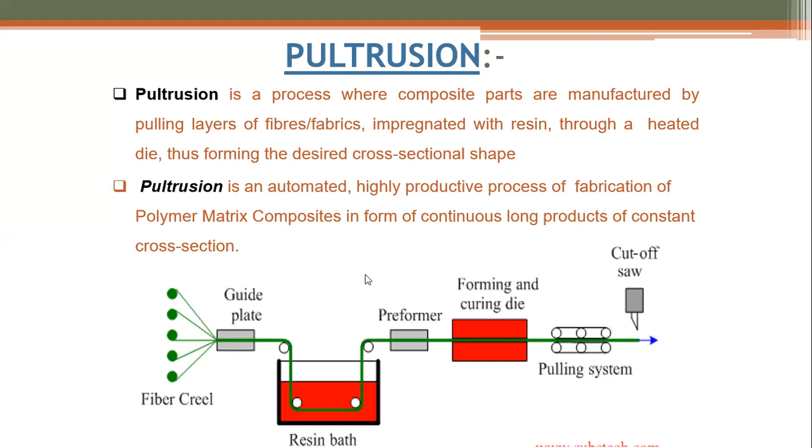Pultrusion means pulling. You can see in the picture these fiber creels being pulled along by the pulling system. You can see the fiber creels there. In the process, the reinforcing fibers are pulled from the fiber creels, which may be followed by rolled mat or fabric creels, and the pulling action is controlled by the pulling system. You can see the rollers.

Then guide plates collect the fibers into a bundle and direct it to the resin bath. Next, fibers enter the resin bath, where they are wetted and impregnated with the liquid resin. So fibers enter the resin bath, and they are dipped there.

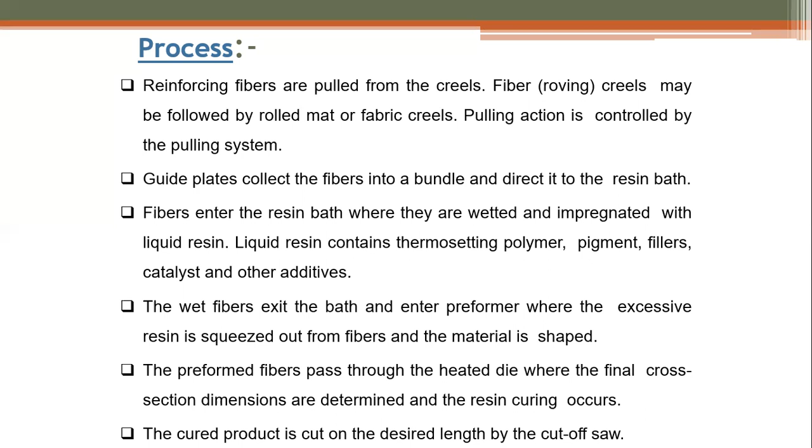Next one is the characteristics of pultrusion. Depending upon the continuous process and the continuous alignment of fibers, it has high productivity. You already know this is a continuous process, so we get high productivity. Second, the process parameters are easily controllable, because there is a division between each and every section of the process.

Next, low manual labor component: because it is an automated process, you do not need much manual labor. Fourth, precise cross section dimensions of the products, because the cutoff saw cuts the product within a time limit, 1 second, 2 seconds, 3 seconds or 4 seconds. That time limit given to the cutoff saw gives very good dimensions of the products.

Next, good surface quality of the products. Generally after curing it gets very good surface quality. Next, homogeneous distribution and high concentration of the reinforcing fibers in the material is achieved, up to 80% for roving reinforcement and 50% for mixed mat plus roving reinforcement.

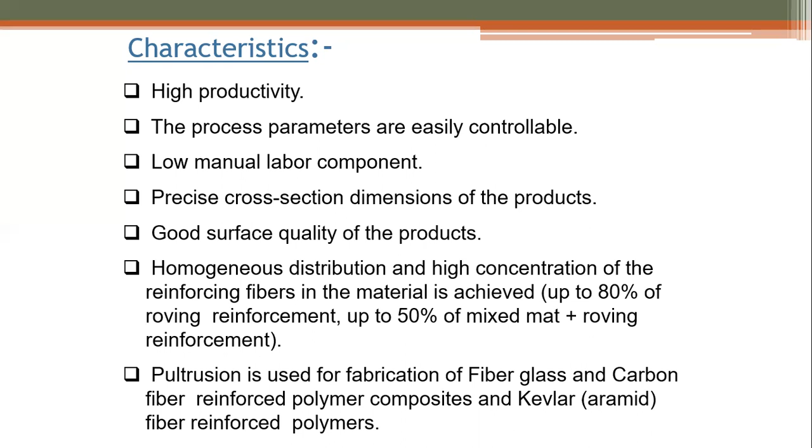Next we are going to the manufacturing process of pultrusion. First of all, fibers are brought together over rollers into a single unit, dipped in the resin and drawn through a heated die, and a continuous cross section composite part emerges on the other side. You can see the same process explained in this picture.

The coated fibers are laid into a single unit, then dipped into the resin, then sent to the preformer and the heated die. Then it is cured, pulled off by the pulling system, and cut off by the cutoff saw. So this is the general process.

You can see the die on the upper part of this slide. This is the heated die, and this is the cross sectional view of the die. By pulling the fibers through this die, the shape of the die is imparted to the fibers, and it is sent to the composite section. Look at the picture for a while.

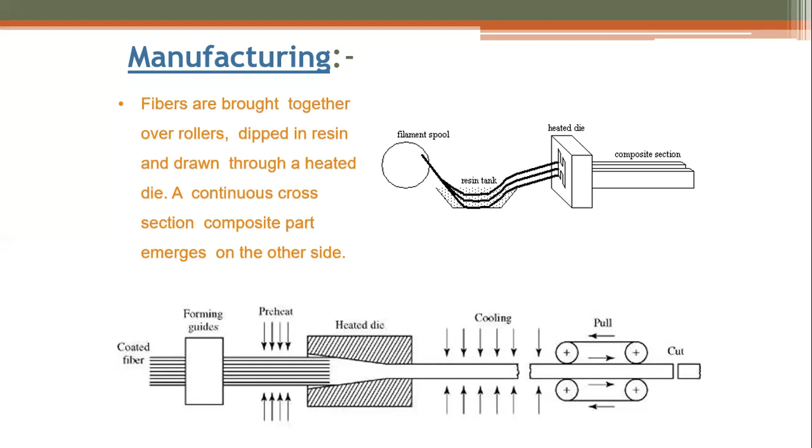So this is the manufacturing process of pultrusion. You can see in the picture the different stages. First the fibers are combined into a single roving from the different fibers. Then they are sent to the forming guides and to the heated die, and then cooled, pulled out by the pulling system and cut to the desired lengths by the cutoff saw.

This is the production view of the pultrusion process. This is the 3D view.

So different types of rovings have been seen here. You can see the starting of the process from the left side. So these are all the different rovings.

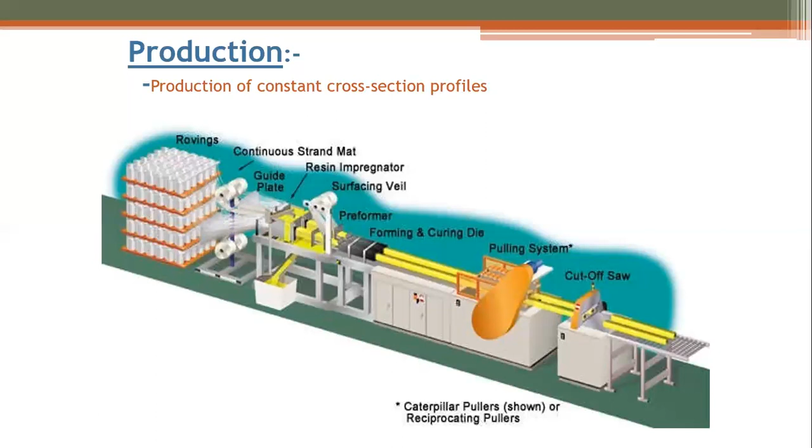Next one is the design. So first of all, hollow parts can be made using a mandrel that extends out the exit side of the die. So they are using the mandrels there which extend the exit side of the die. Then variable cross section parts are possible using dies with sliding parts only. So the continuous formation of these rovings has been used with the sliding parts only.

Two main types of these dies are, first one is the fixed die and second one is the floating die. So in these dies, the fixed dies can generate large forces to the wet fiber, but floating dies require an external power source to create the hydraulic forces in the resin. And multiple dies are used when curing is to be done by the heated dies. So a number of dies are used when curing is to be done by the heated dies only.

So this is for the design part which is to be selected for the different types of dies. So two main types of dies have been used. First one is the fixed die. Second one is the floating die. So the floating die is not used with any support. These fixed dies can generate large forces to the wet fiber, but the floating die requires an external power source. So that is the main difference.

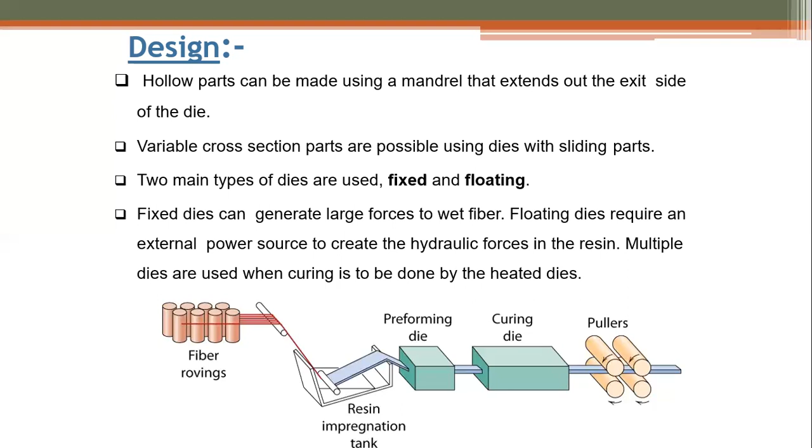And it has a very low scrap rate, that is up to 95% of the materials are utilized, which is very high compared to the layup methods, that is hand layup and spray layup methods. In those methods 75% of the materials are used, but compared to those methods, this pultrusion method utilizes 95% of the materials. So that is a very high rate. That is why we are getting a very low scrap rate there.

Rollers are used to ensure proper resin impregnation of the fibers also. Then material forms can also be used at the inlet to the die when materials such as mats, weaves or stitched material are used. So these material forms can also be used at the die, in different forms, that is the mats, weaves or stitched material.

Next, for curing, tunnel ovens can be used. Tunnel ovens means the two ends of the oven are open. General types of ovens are opened at only one end, but the specialty of tunnel ovens is opening in two ways. That is highly used in the heat treatment process, but here we are using the tunnel ovens for curing.

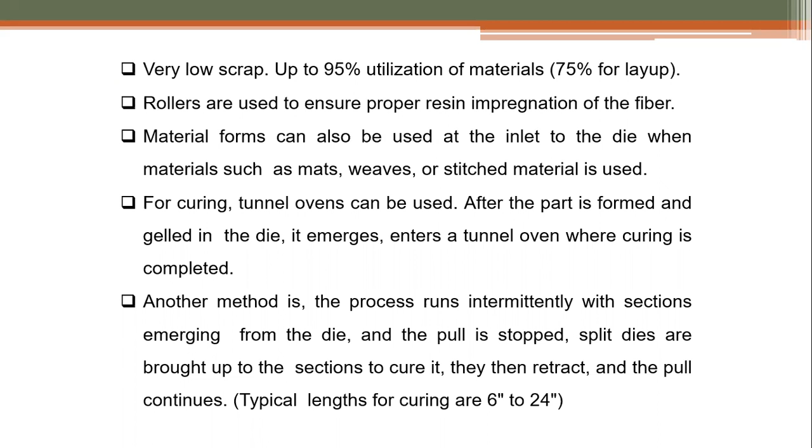Next one is the materials used for the pultrusion process. We have two types of materials here. First one is the fibers and second one is the resins. The most used fibers are carbon, glass and aramids. These are the three different types of fibers, and highly used resins are polyester and epoxy.

So the next processing method is speeds. The basic speed of the pultrusion process is 0.6 to 1 meter per minute. Mostly fibers used are carbon and glass. The thickness is 1 to 76 mm, and the diameters are 3 mm to 150 mm.

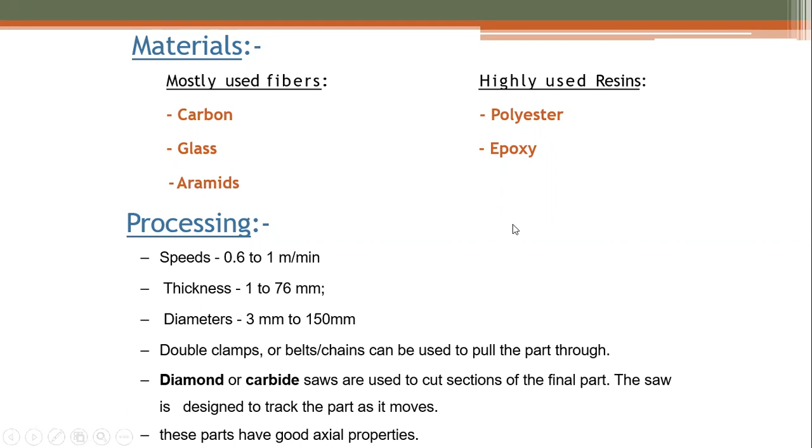Next one is the advantages and disadvantages. Coming to the advantages, it has good material usage compared to the layups. Layups means spray layup and hand layup method. Next, higher throughput and higher resin contents are possible.

And the disadvantages are part cross section should be uniform. Fiber and resin might accumulate at the die opening, leading to increased friction, causing jamming and breakage. Next, when excess resin is used, part strength will also be decreased.

Next, voids can result if the die does not conform well to the fibers being pulled. Voids means small particles formed in the liquid resin, and the interior structure of the voids is hollow. Next, quick curing systems decrease the strength of the pultrusion method.

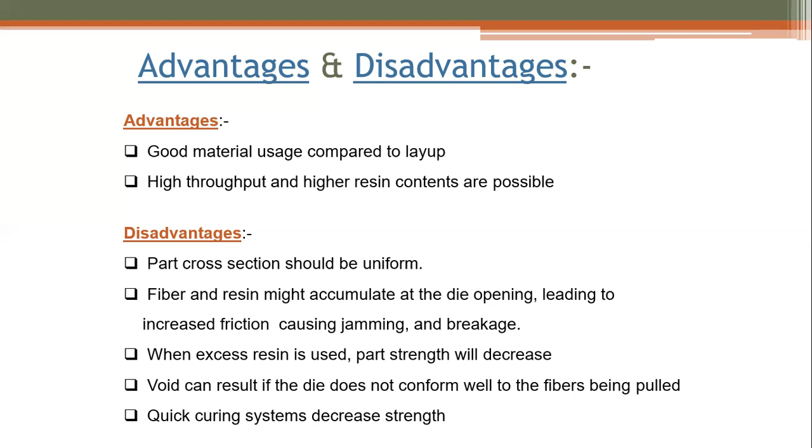Low material scrap rate. So a very low material scrap rate is obtained in this process. And last one is the good quality control of sections. This is the advantage. Next is the potential problems of the pultrusion process.

The potential problems means the disadvantages. First one is improper fiber wet out. When dipping in the resin and then curing, sometimes there is improper fiber wet out, so it is not cured fast due to the rapid processing. That is also a main disadvantage. Next one is the fiber breakage.

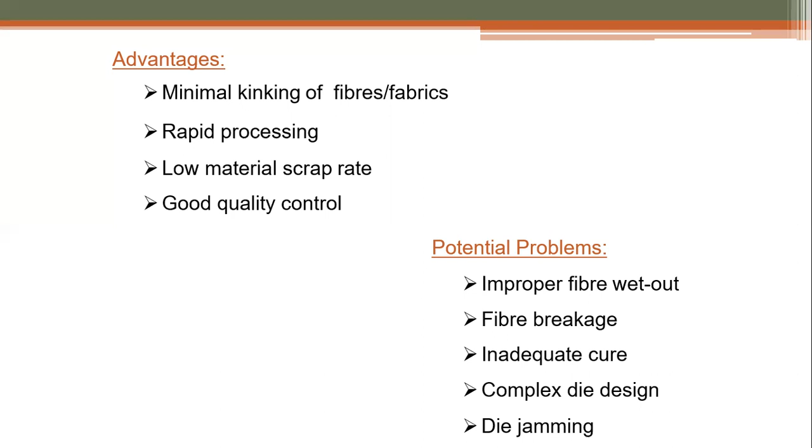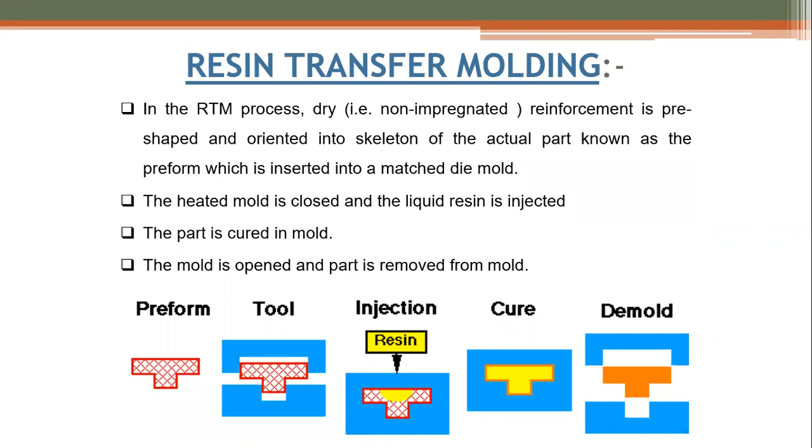So in the next class we will study resin transfer molding and other methods. So this is all about the pultrusion process. Any doubts? So if you have any doubts, ask me.